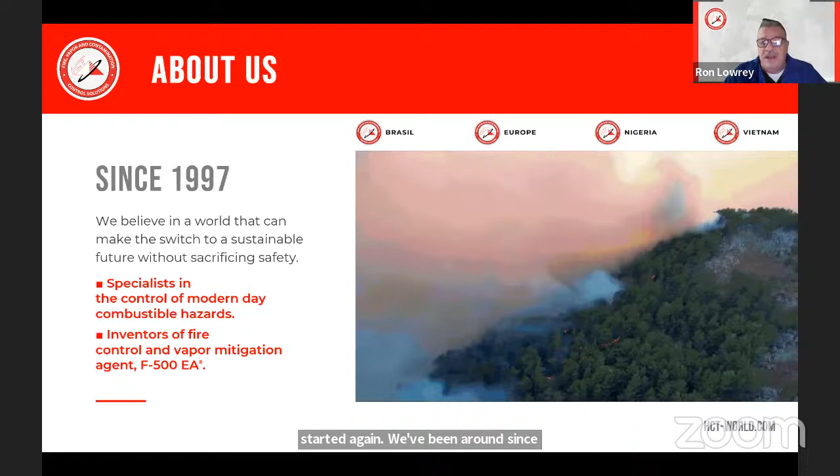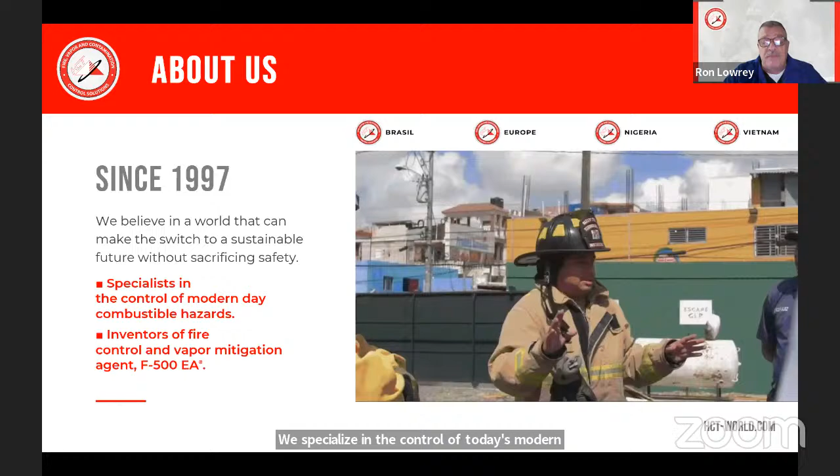So just a little bit about Hazard Control before we get started. We've been around since 1997, a global company. As you can see across the top there, we're pretty much on every continent. We specialize in the control of today's modern hazards. We are the inventors of encapsulator technology that can be used for fire control and vapor mitigation.

So, when we talk about encapsulator technology and hazard protection, it is a multi-class encapsulating agent that can handle various classes of fires, be that A, B, D, or the ever-present lithium-ion batteries that we're currently dealing with, which can all be handled with one F500 encapsulating agent. The topic that we're going to focus on for today's webinar is strictly around structure fire applications.

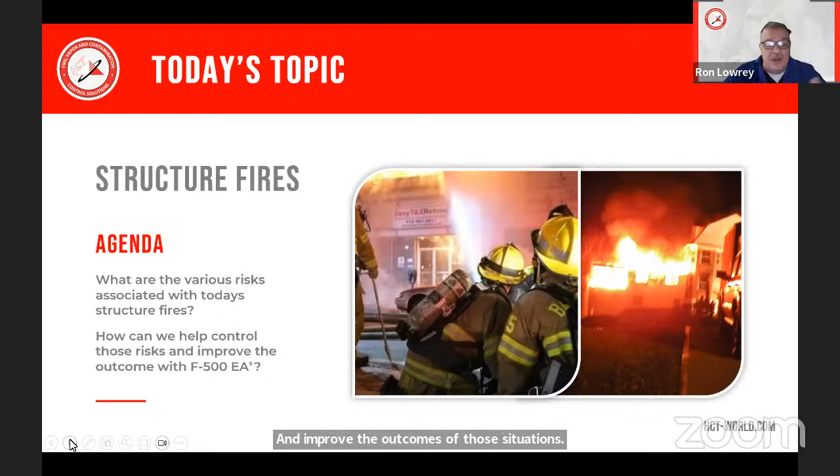So the agenda for today's webinar is we're going to look at the various risks that are associated with today's modern structure fires, and then how we can help control and limit those risks and improve the outcomes of those situations with F500 and with encapsulator technology.

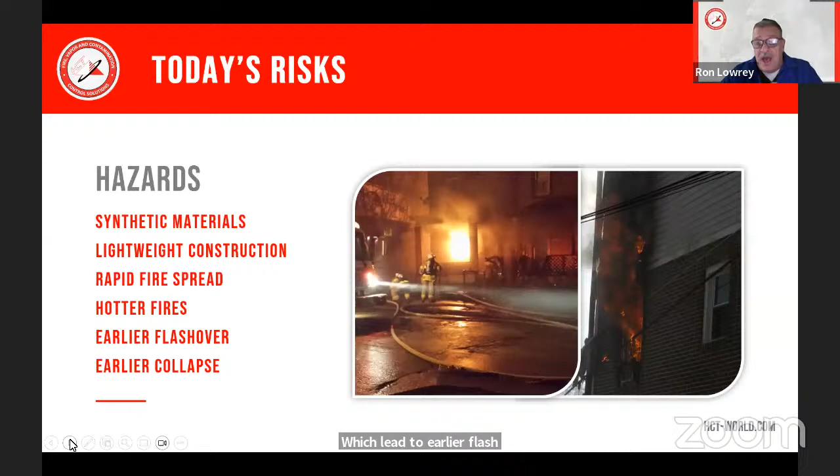So when we're talking about these modern hazards for today's fires, the things we're talking about are synthetic materials and the lightweight construction that we're dealing with, which then leads to rapid fire spread and hotter fires than we've had in the past, which lead to earlier flashovers and an earlier chance of collapse within that structure.

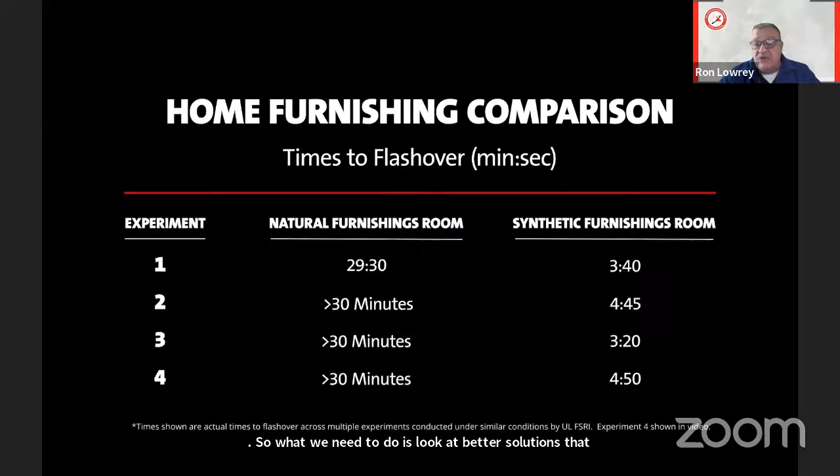You know, you could open that nozzle up on a little wider pattern, and you could see why we could do that 30, 40 years ago, because you still had fairly decent conditions inside that fire. That just isn't possible today because of the different fires that we're facing. So what we need to do is look at better solutions than the water we were using 40 years ago to fight these same types of fires. So even with the modern structure fire, it's still calling for a better solution than just water to help control that fire.

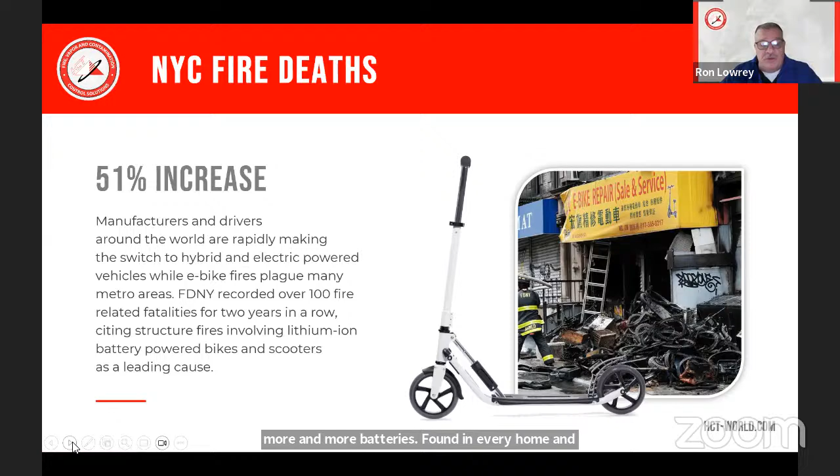In addition to that, we now have the lithium-ion batteries that we're dealing with. They're everywhere. Just think of the modern home: laptops, cell phones, power tools, mobility devices, scooters, hoverboards, bicycles, maybe RC cars that your kids would have. There's more and more batteries found in every home, and they're both leading to a fire source, but also contributing to the fire.

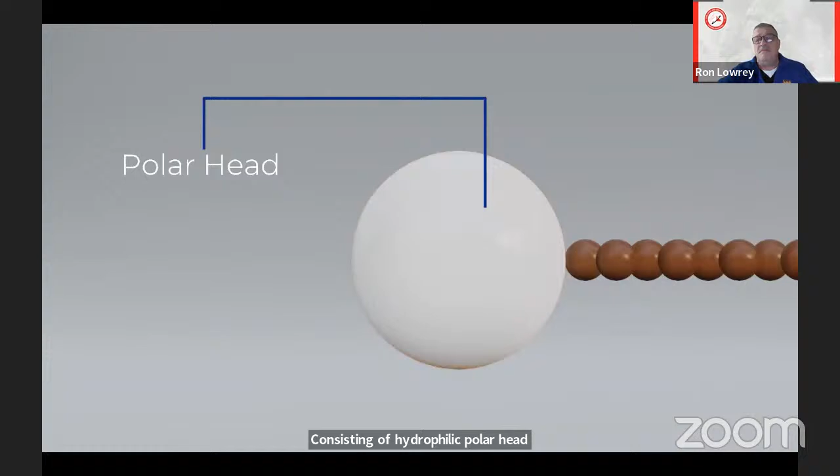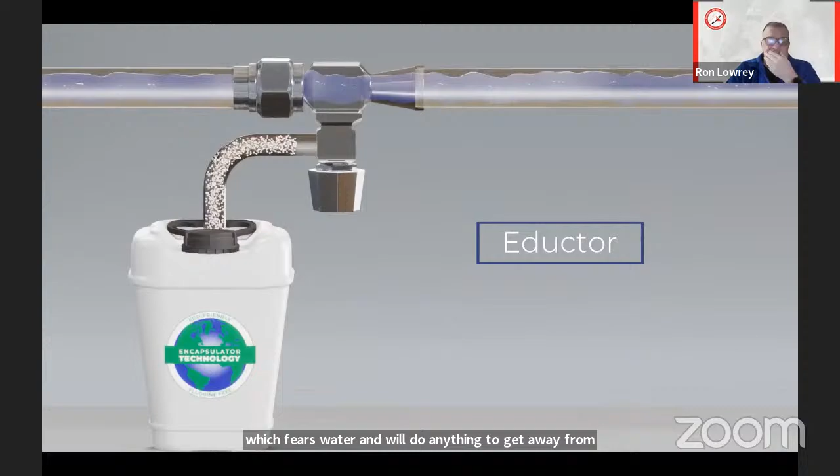Encapsulator technology, the next generation of fire and hazard mitigation. First, we start with a simplified version of a single encapsulator agent molecule consisting of a hydrophilic polar head which loves water, dissolves in water, and a hydrophobic non-polar tail which fears water and will do anything to get away from water. Once the EA molecules enter the water, they instantaneously and automatically orient with the non-polar tails inward and the polar heads outward, forming millions of spherical micelles.

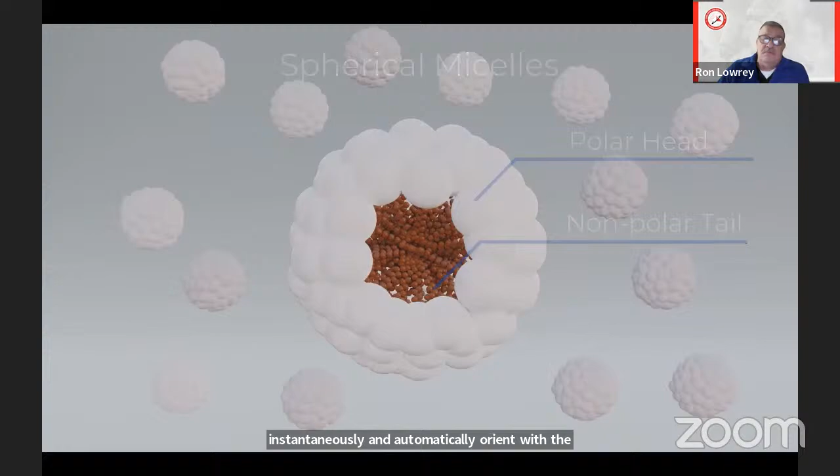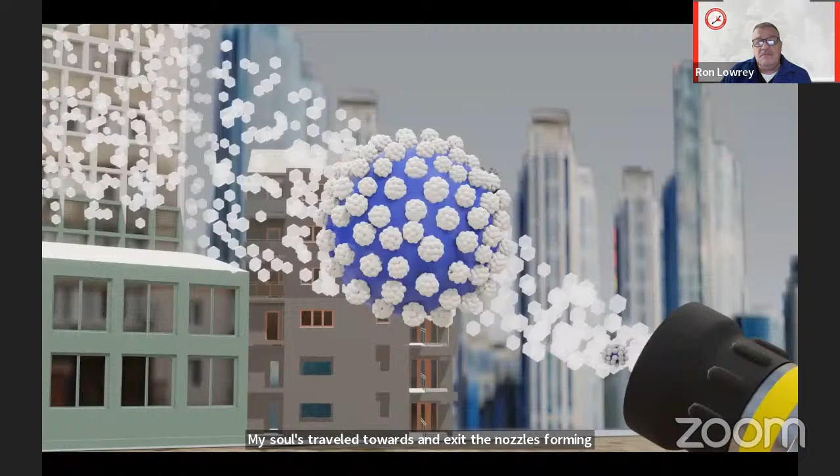Micelles travel towards and exit the nozzles, forming EA droplets. Micelles nearest to the surface of each droplet automatically break apart. The nonpolar tails orient outside the droplet, with polar heads on the surface, forming an EA skin on the surface of every droplet. In addition to the EA skin, there are millions of molecular spherical micelles within each droplet.

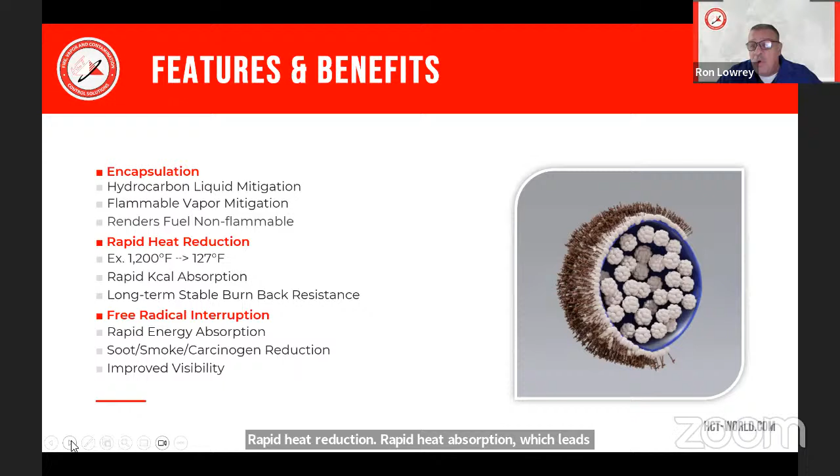So when we think about that micelle, that molecular structure and what it does for us, it gives you some pretty unique features. The first is encapsulation: the ability to encapsulate carbon and hydrocarbon, both liquid and vapors, and render those non-flammable, chemically, molecularly separating the fuel from the oxygen. Rapid heat reduction, rapid heat absorption, which leads to a much more tenable, cooler atmosphere, which then gives you long-term stable burn back resistance.

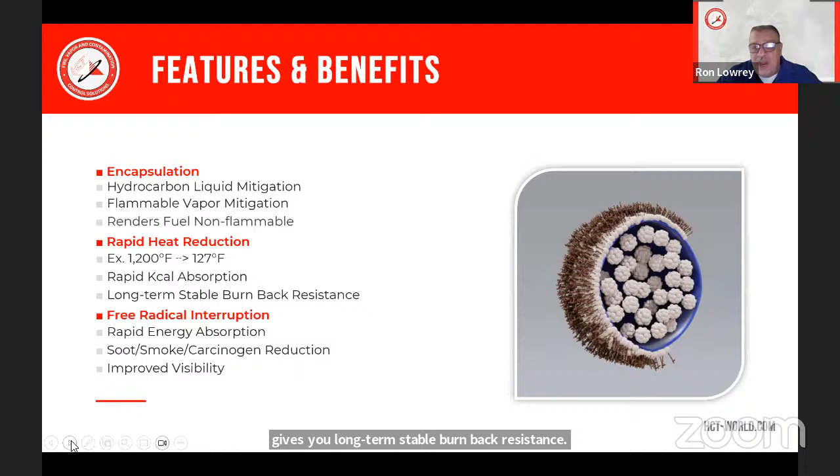But most importantly, this interruption of the free radical chain reaction gives us a drastic reduction in the amount of toxins and carcinogenic soot and smoke, with improved visibility. So the next few slides, we're going to do some real quick videos to go over those three unique features. So again, the first is the encapsulation.

Here we're going to be using fuel. Some of the other videos, when we go on, we'll actually be able to talk with some of the testimonials about encapsulating Class A vapors. But in this instance, we've got some gasoline on the ground, using the F500 to encapsulate that fuel, render that fuel as a non-flammable substance.

We'll take a torch and ignite the fuel on both ends of that encapsulated gasoline. As you can see, the material in the middle is non-flammable. It can no longer burn because that fuel has been locked inside that spherical micelle. It's been bound up inside the micelle and rendered non-flammable.

Here we're going to extinguish the fire completely, and then again, the firefighter will use the torch to show that fuel, after extinguishment, after treating with the F500 and the encapsulation that's taking place, is no longer flammable, no longer ignitable.

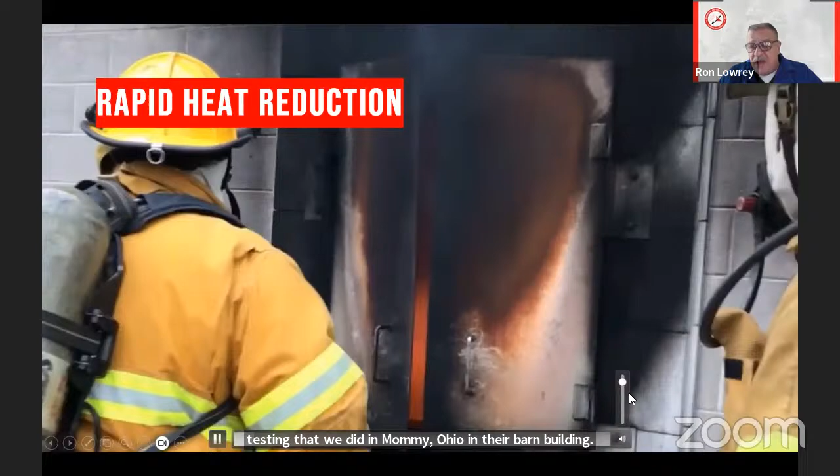Second is this rapid heat reduction. So this was some testing that we did in Maumee, Ohio in their burn building. We were actually pre-mixed at 0.5% with F500, so only 0.5% solution, using their burn room. So we have 1,000-degree ceiling temperatures and 1,200-degree temperatures at the base of the fire.

You're going to see not a direct attack on the fire. The firefighter is just treating the ceiling space above the fire. Shut the nozzle down already. Again, we'll check it now with the thermal imaging camera.

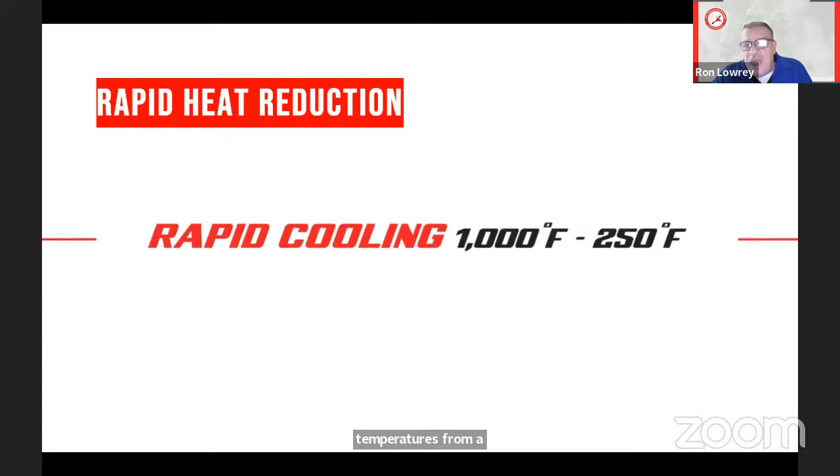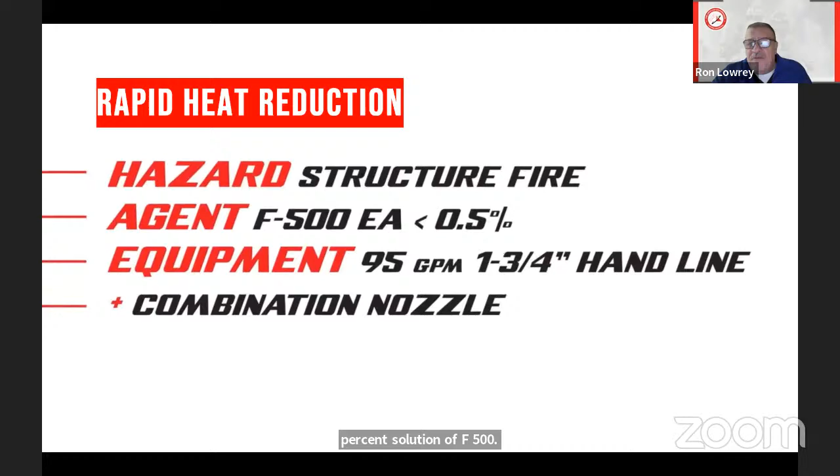So we took ceiling temperatures from 1,000 to 250 degrees and that base of the fire from 1,200 to 400 with a 0.5% solution of F500. So again, very rapid cooling, making that environment much more tenable.

So F500 works better with a dispersed pattern than it will with a straight or a smooth bore. That morning fire, that first fire we just saw, was with a smooth bore. Now on this fire we're going to be using a combination nozzle. We're still at a 0.5% solution.

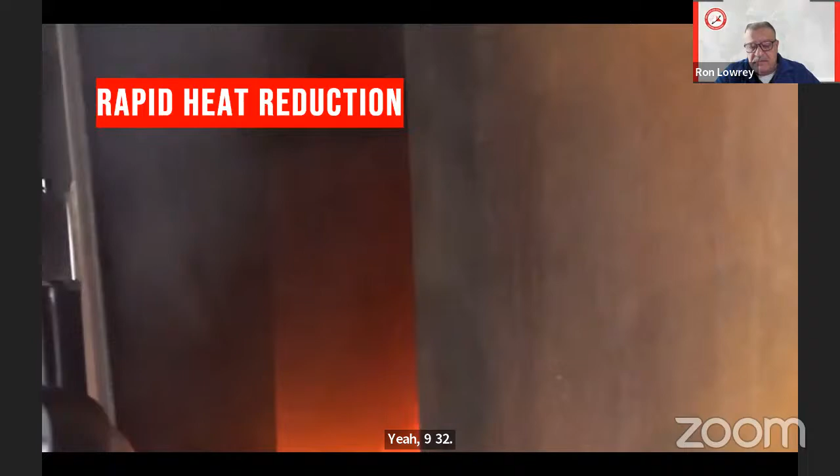See, that lower stuff doesn't look like it's burning. No. That's the stuff from this morning. So we talked earlier about that stable burn back resistance. We built this evening fire on top of what we had previously extinguished in the morning. The material at the base of the fire doesn't want to burn.

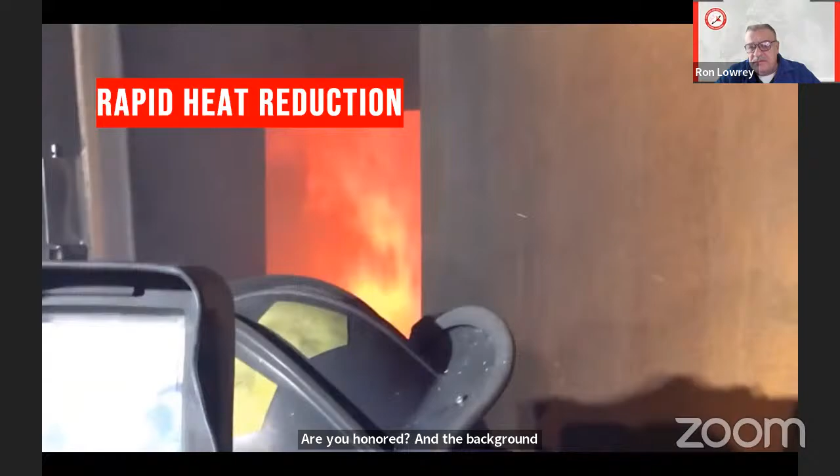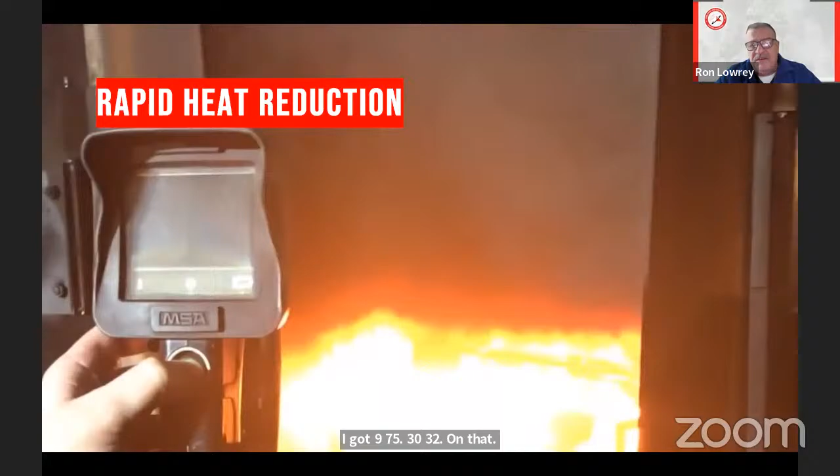930 is the top. That's it. I got 975 now. It's inside. 932 at the top and about 300 at the bottom. So now we're only 300 at the base, even though we're still around 1,000 at the ceiling. 470.

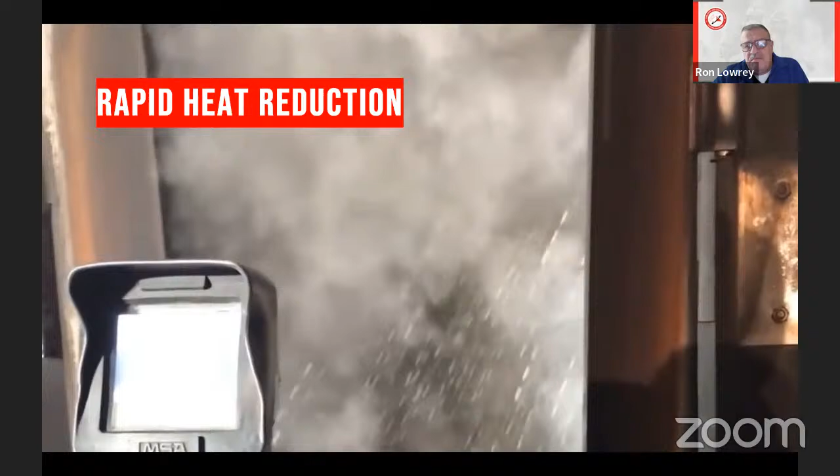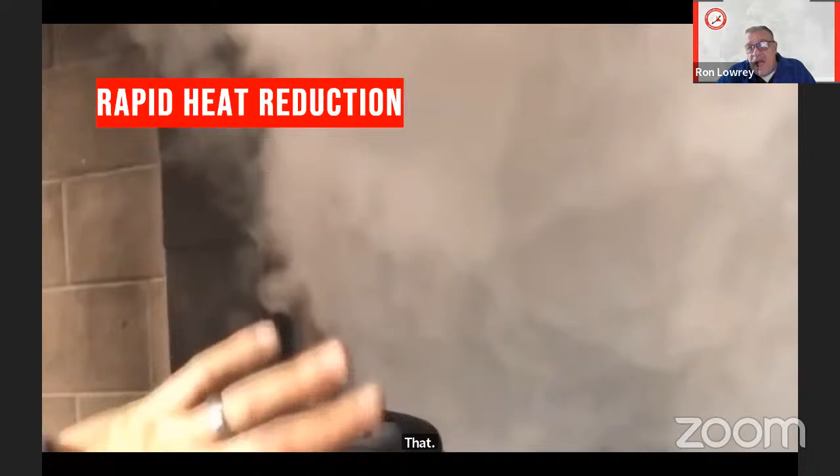So we went from 930 degrees to 113 degrees within that burn room in a matter of 7 or 8 seconds. So we're 77 degrees ambient in the hallway.

The next is that encapsulation. Again, the free radical interruption is, to me, the most important aspect of the agent. So let's think about that modern fire that we saw in the video earlier compared to the legacy furnishings. Pretty similar when we're looking at the smoke coming off of that fire. We have that heavy black smoke, just like we saw in that burn room.

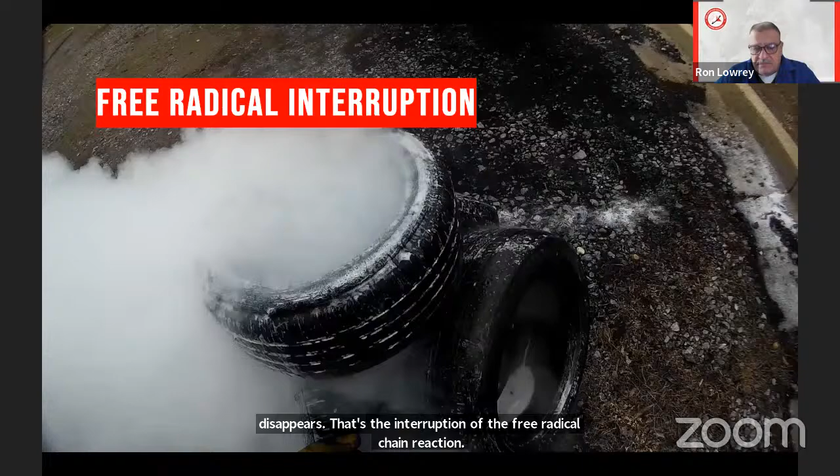But yet how quickly that heavy soot-laden smoke disappears. That's the interruption of the free radical chain reaction, stopping that formation of soot and smoke. So actually the ability to scrub that IDLH atmosphere and improve the conditions for our crews as they're making entry. Proactively scrubbing the smoke, removing the toxins ahead of the nozzle.

So when we look at that and how it can affect a structure fire environment, how we can reduce those risks, I want to draw your attention here to a study that was done by the Laval Fire Department up in the Quebec province of Canada. So the Laval Fire Department partnered with the University of Ottawa.

They were looking at the use of encapsulator technology to lower the exposure of their firefighters to the toxins, the carcinogenic toxins that are in the smoke. They did this in honor of one of their captains that they lost to job-related cancer. So they dedicated this testing in his honor to see if they could possibly make the profession a little bit safer.

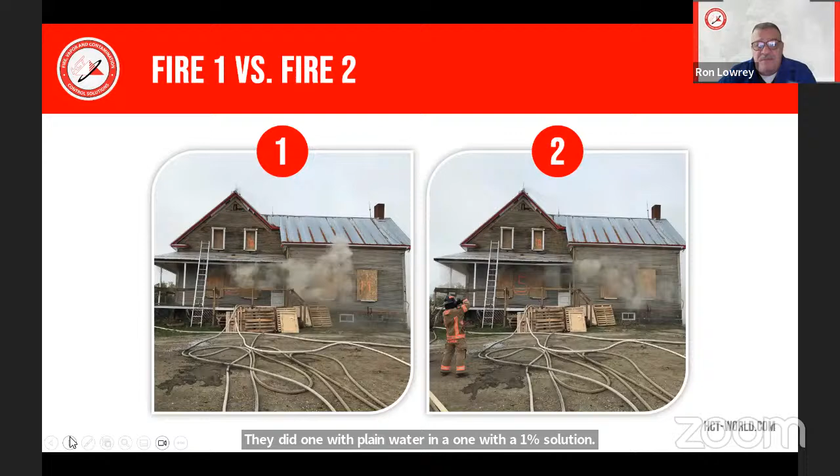So when they conducted this testing, they had an acquired structure that they did multiple burns in. The first 2 burns that they did were vent limited. They did one with plain water and one with a 1% solution of F500. So here we have the pictures from fires 1 and 2, those vent limited fires.

Here are the observations from the firefighters that were involved in that testing, both interior on the hose crew and the incident commander. As we can see, with the use of F500, they were able to immediately stand following the extinguishment of the fire without feeling any heat because the room had been cooled that quickly. The visibility increased significantly, reducing the amount of smoke that was present. So much better visibility within the room.

And then with F500, there was the ability to extinguish secondary fires. When you look at the report, they talk about when they used water on the fire, they had overhaul to do. There were some fires burning underneath the mattress on the bed.

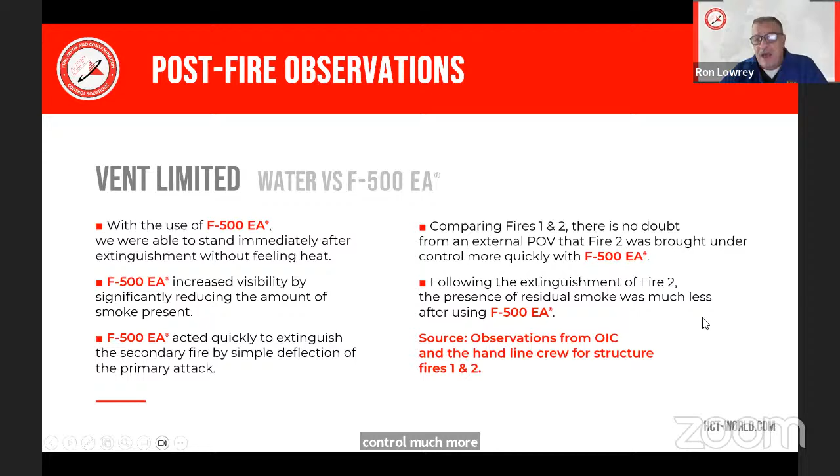The wood framing around the window was still burning, the window frames. When they used F500, they didn't notice those secondary fires after they shut the nozzle down. From the incident commander's point of view, again, comparing fires 1 and 2, there's no doubt from an external point of view that fire 2 was brought under control much more quickly, and there was much less residual smoke after the F500 was used.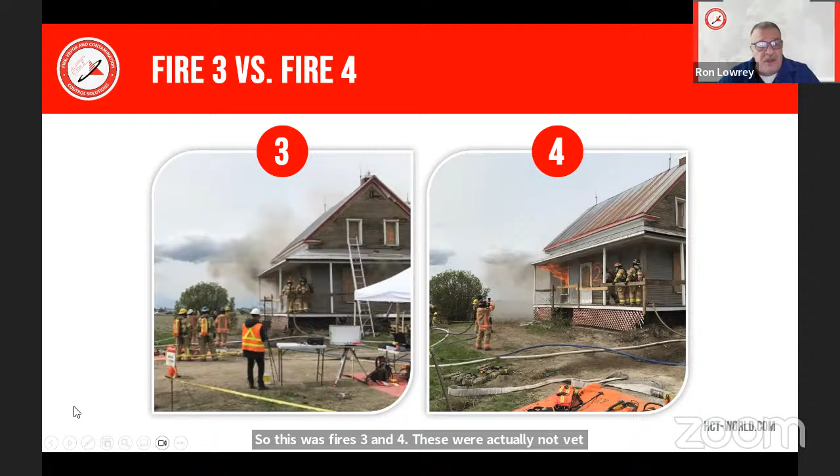Now, in addition to the observations, what else they were doing is in between each evolution, the firefighters were donning brand new protective hoods. After each evolution, those hoods were taken off, they were bagged, and they were given to the University of Ottawa that performed testing on those hoods. So this was fires 3 and 4. These were actually not vent limited. They were a vented fire. As you can see, they took some of the plywood off, so they had a vent opening for the fire for these 2 fires.

So again, the observations from the hose line crew and the incident commander: after the initial application of F500, flames on the floor disappeared in a fraction of a second. So we talk about that encapsulation ability of the agent to encapsulate flammable vapors. Well, what's burning in a Class A environment? That material is breaking down through pyrolysis, off-gassing flammable combustible vapors. The agent instantaneously encapsulating those vapors takes the fuel source away, which gives you that almost instantaneous removal of the fuel that puts the fire out, takes the flames away.

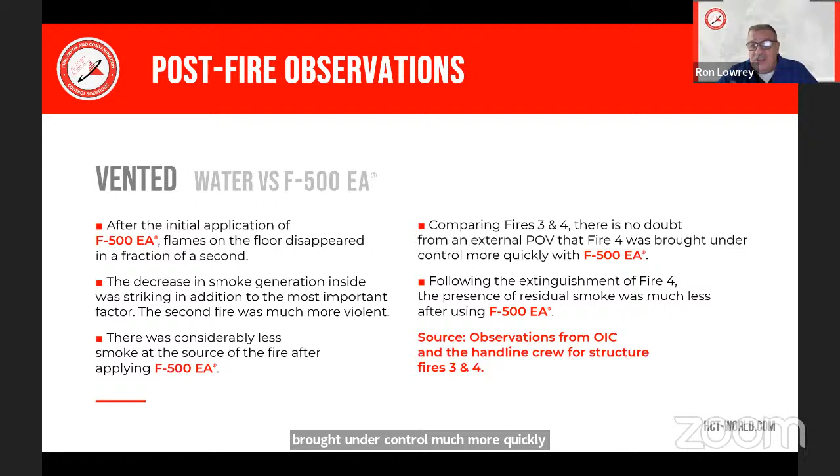The decrease in smoke generation was striking, most importantly because they said that second fire with F500 was a more violent fire than the one they used to extinguish with water. And again, there was also considerably less smoke within the room after applying F500. Again, we see the same thing as we saw with fires 1 and 2 from the incident commander, that the fire was brought under control much more quickly and that there was much less residual smoke after the fire on the outside of the structure.

So when we talk about what those firefighters saw and what their observations were, those can be subjective. Somebody else's observations may have been a little bit different. Maybe they didn't think it was as drastic. This, though, is fact. We can't argue with what the results of the testing were from the University of Ottawa. So when they looked at those hoods and they compared the polyaromatic hydrocarbons that were trapped in that material of the hoods that they tested, they saw drastic reductions when F500 was used. So much less of those toxins trapped within that hood material.

As we can see, a 71% reduction, an 83% reduction, a 60% reduction, 63, 83, 89, 90. We come down here, we went from above the level of detection to below the level of detection. Same here. The other materials, who knows? Both were below the level of detection, but there easily could have been a decrease there. And when we look at some of these highest reductions up here, some of these materials,

I'm sure I'm going to butcher the names, but the naphthalene is used in plastics, synthetics, fibers, and dyes. The next one here is used in plastics, polymers, and electronics. The fluorene's used in plastic and dyes. The anthracenes, plastic and synthetic fibers. The fluoranthene, it's a byproduct of burning wood, that we have in every structure. The pyrenes are used in plastics and LEDs. We're finding all of this material in a modern structure fire. This is what we're facing from the plastics and the synthetics that are now inside those structures.

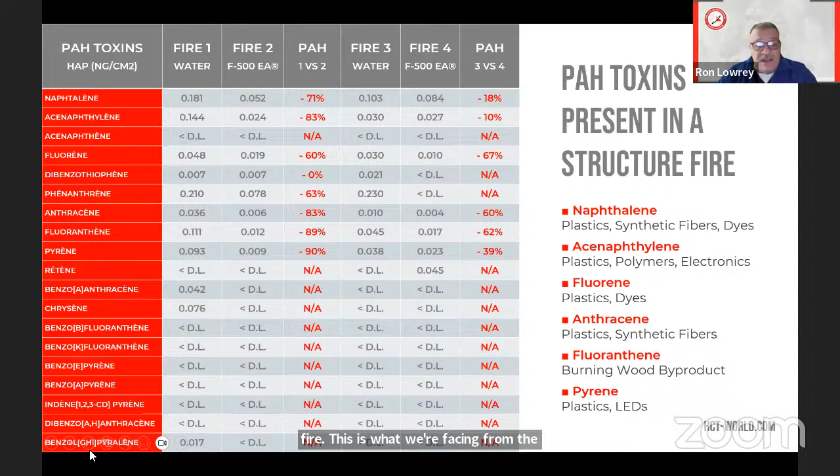So this was the conclusion from the committee. So this was 30 firefighters that were in that group, the committee they formed to evaluate and assess the encapsulator agent. So the committee's confident. This was a unanimous decision by the committee. The committee is confident that the encapsulating agent reduces the firefighters' exposure to carcinogenic contaminants.

Furthermore, its use is also effective for Class B, C, and D fires, while water should not be used on those categories of fires. For those reasons, they are moving forward with the use of an encapsulating agent to prevent cancer in the Laval firefighters. So this was a study by firefighters for firefighters. So again, great information. Let's look at some real world uses with F500.